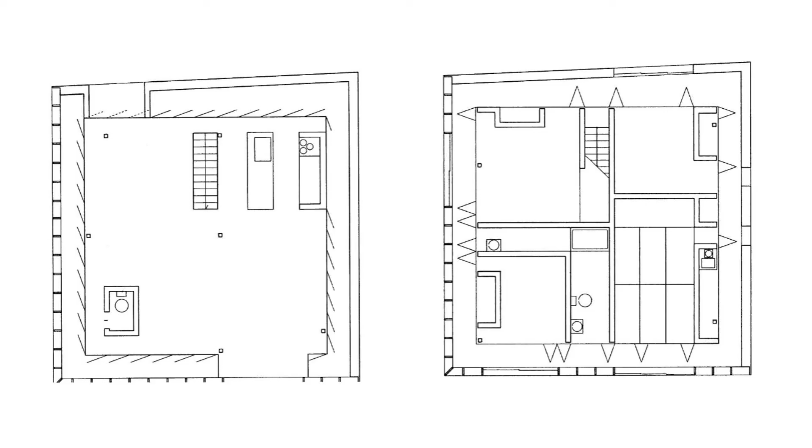The first house they built together is called the S House. As you can see, in a typical setting, it resembles a lantern, just a few layers of polycarbonate. And inside, as you can see from these plans, the house is organized with a series of rooms and a perimeter corridor that connects them all. Each room opens inward and only minimally to the outside. They have this sort of corridor that separates the wooden rooms from the translucent gallery, making the house glow like a lantern at night. At the same time, it creates a space of translucent intimacy.

This is the interior of the house, the one they designed together. It's quite different from other houses they each designed separately. Take, for example, this weekend house, a work by Ryue Nishizawa, the male partner in the duo. It's a weekend house, and therefore, when not in use, it's meant to be hermetically sealed, as you can see here, almost like a hermetic box.

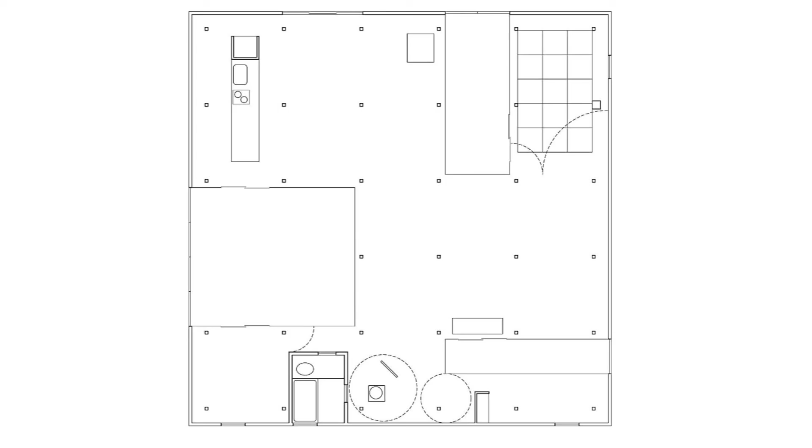And in the floor plan, you can see that it is crossed by large courtyards that penetrate the interior and are finely enclosed. So, when the house is open, it looks like this, a single-story house perforated by courtyards, but which can be sealed like a box. And ultimately, this house reveals the light and translucent quality of Nishizawa's architecture, which strives for the walls to be so thin they almost disappear, and for the structures to be so slender they seem almost impossible. And this is the image of this house by Ryue Nishizawa.

I'm going to contrast this with a house by Kazuyo Sejima called The Small House, which truly lives up to its name. It's a house, as often happens in Tokyo, with one floor stacked on top of another, and with a peculiar shape that simply adapts to the irregularities of the site and the need to accommodate its functions. You can see here that at one point the house even has to be set back to make room for the front of the car, because otherwise there's no way to fit the usual functions of a house into the mere 80 square meters available.

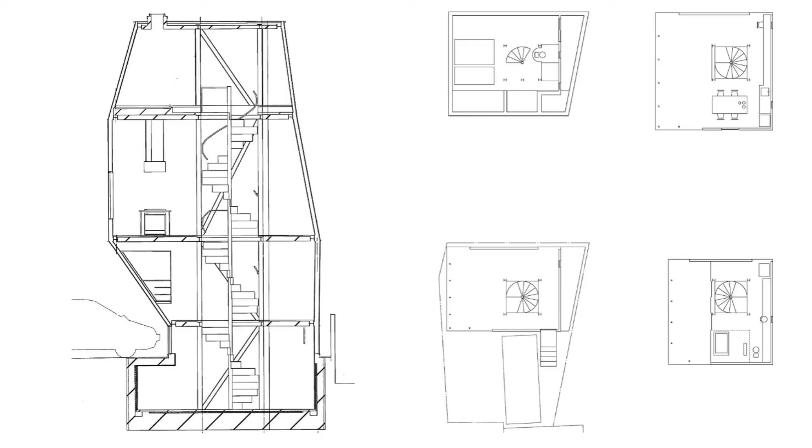The house is traversed by a spiral staircase that stacks these small spaces one on top of the other. And this is the image of its interior that you can see here. Shortly after, Kazuyo Sejima designed another house that captured everyone's imagination, the Plum Orchard House, again in Tokyo. This house is a perfectly cubic structure, built with almost no thickness to the walls.

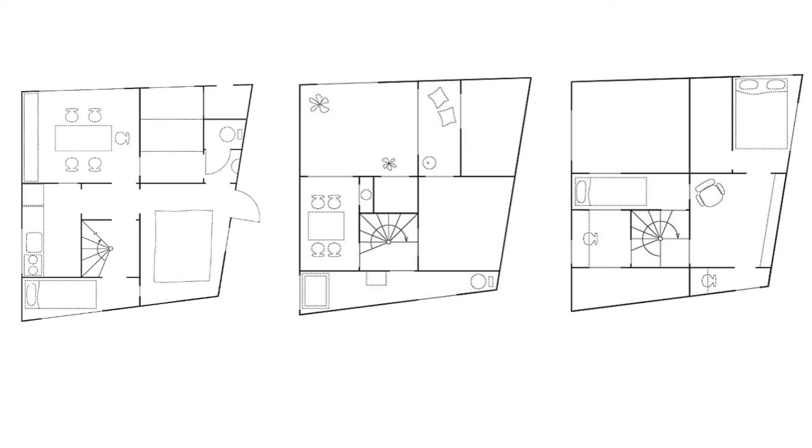Just take a look. This is the floor plan of the house. Don't mistake it for a schematic. It's the actual floor plan. This shows the thickness of the partitions and walls. Why? Because the entire house is made of metal sheets, nothing more, just cut metal sheets. As a result, the connection with the exterior relies on this almost impossibly thin thickness. And it creates, so to speak, two intimate spaces.

And in the end, these open and cut-out alcoves resemble more a house made of paper than a structure capable of withstanding the elements or regular use by people. Now let's contrast these last two houses by Sejima with this one by Nishizawa. This house is best explained with this sketch by the architect.

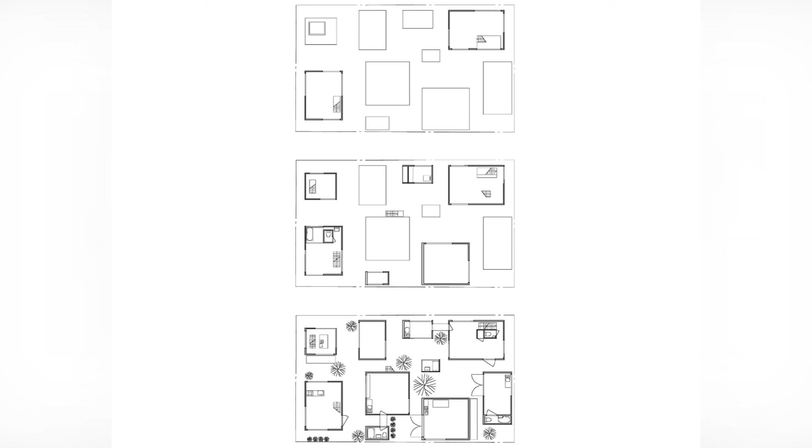Instead of designing a typical house, 2.5 or 3 stories with different rooms, he said, "Since the owner wants to rent out the rooms, why don't we take the rooms and scatter them across the plot like a game, like a concert of boxes within an enclosure?" And this is the floor plan of that unusual house, which you'll understand better when you see it photographed. A set of rooms, each of which is a separate space someone uses. Take a look at it from above.

And now, let's take a closer look at the bathroom. This set of corridors and small spaces forces you, of course, to step outside to go to the bathroom, move from one room to another, or use the kitchen. This extreme fragmentation of the program is something you have to be bold enough to attempt, and the client has to accept that their house will be a collection of separate rooms, almost like pavilions in a garden. However, it creates a completely new type of architecture.

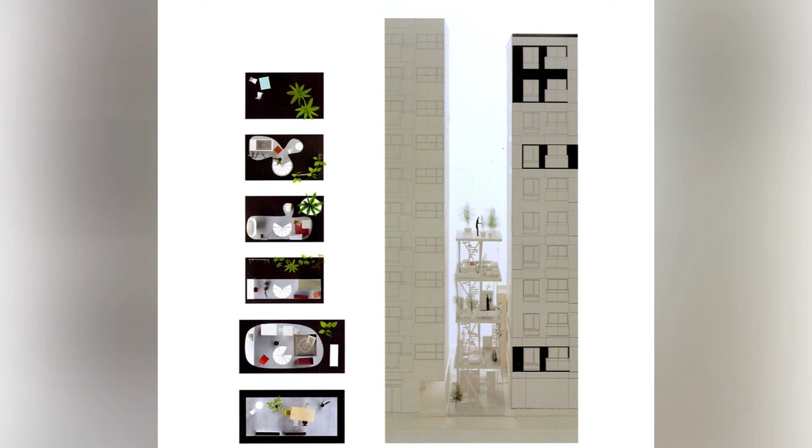Kazuyo Sejima and Nishizawa took these ideas even further in an unbuilt house project that I've brought up here, even though it was never constructed, because it's so extreme that it deserves to be seen. It's called The House and Garden. And notice how what was once a series of rooms placed one behind the other is now stacked one on top of the other. Essentially, each level contains a tiny space and vegetation. It's a house of dizzying staircases and plants, nothing more.

Sejima has often said that she can't live without plants, that she can't live without trees. She's also said that she doesn't read architects. What she loves are plants, flowers, and fashion. Many might see this as a provocation, especially when other architects pride themselves on being well-read and knowledgeable. But Sejima, perhaps even emphasizing her difference, speaks of a love for plants over a love for books.

For many of us who come from a literary culture, this may be difficult to understand, but Sejima's architecture cannot be fully grasped without considering her deep love for plants and that ubiquitous presence of vegetation.

And this is the last house I'll share with you, and this one was indeed designed by both of them. It was created for a Swiss client, and here I'm showing it only as a model, a very large model at a 1:2 scale that was exhibited at the MUSAC in León during the monographic exhibition dedicated to them in 2007. As you can see, the house is almost amoeba-shaped, with circular courtyards and surrounded by a perimeter of glass.

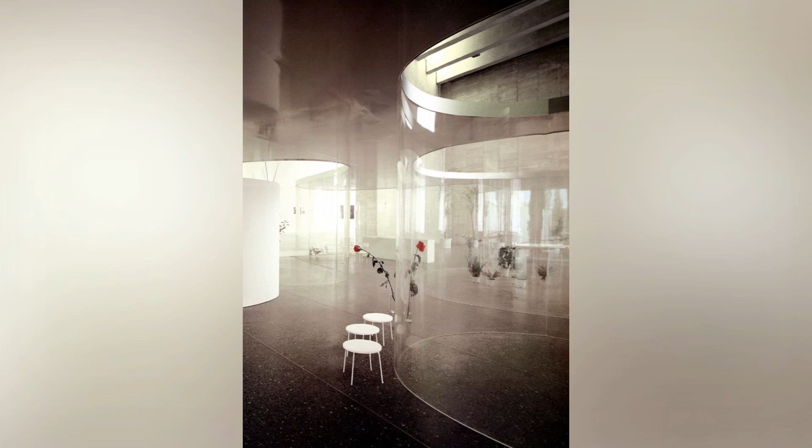The house merges with the surrounding vegetation at its original site, but here, of course, we see it within the walls of a museum, only in this model. At a 1:2 scale, you can see it in the MUSAC, and when you look up, you can see the grand structure of this museum by Tuñón and Mansilla.

These 8 houses trace a journey, and I believe that journey is best summarized not by any of the houses themselves, but by a design object, the tea set they designed for Alessi, which was first exhibited at the MUSAC. Each piece was crafted, carved from soap shaped like fruits, so that in the end, the tea set resembles a tray of fruits. It's an object filled with poetry and magic, something that has to captivate us all.

It's so magical to transform a tea set, where you would typically imagine a tray with the pieces, into a basket of fruit, a basket of metallic fruits. And this is what this pair of Japanese architects has created, a partnership that, as I mentioned, began in 1995. However, Sejima had a bit of history before that, which I will briefly recount.

Sejima entered the world of architecture with this work. A women's residence, a work that fascinated all of us, not only because of Sejima's design itself, but also because of the social fabric that created it. It's a residence for single women. These are women in their first year of work at a large company, and the company believes it must protect them during this initial year in a big city.

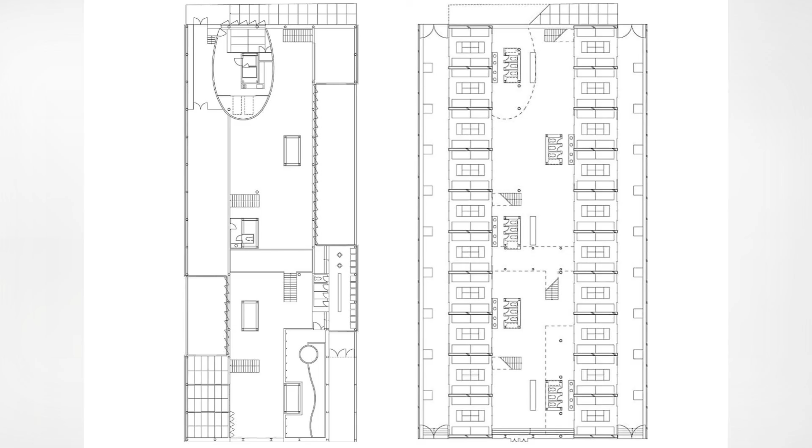These are women coming from rural areas, and the idea is to keep them safe in a setting that is a mix of a boarding school and almost a penitentiary, as you can see. The young women sleep in small cells, 4 to a room, with translucent walls, constantly supervised by a matron who oversees the entire facility. We might see this as an intolerable restriction of freedom, but in the Japanese context, it was viewed as a way to protect young women from rural areas during their first year in the big city, until they could learn to navigate and manage the complexities and challenges of this new environment.

As you can see, everything was constructed with Sejima's signature precise geometries and lightweight surfaces. But at that time, she was still partly influenced by her training with Toyo Ito, which is evident in these gestures, these pastel colors, and these oval shapes that stem from the postmodern architecture of that era. Sejima wasn't fully Sejima as a creator yet, but she was beginning to show it in the radical nature of her proposals, which ultimately expresses itself in environments like this, reinterpretations of traditional Japanese architecture for very new and very different uses, those of contemporary Japanese corporations.

Her second work was also quite disconcerting, and this opportunity came to her due to her condition as a woman. Arata Isozaki, whom we've already discussed because he promoted Rem Koolhaas's first international project in Fukuoka, also promoted a housing complex where he decided, with the help of his political connections, that the project should be designed exclusively by women architects. So, the various residential units were assigned only to female architects. As a result, Sejima was commissioned to design this residential block, which she executed once again with dimensions that seem almost impossible to achieve, so extremely narrow.

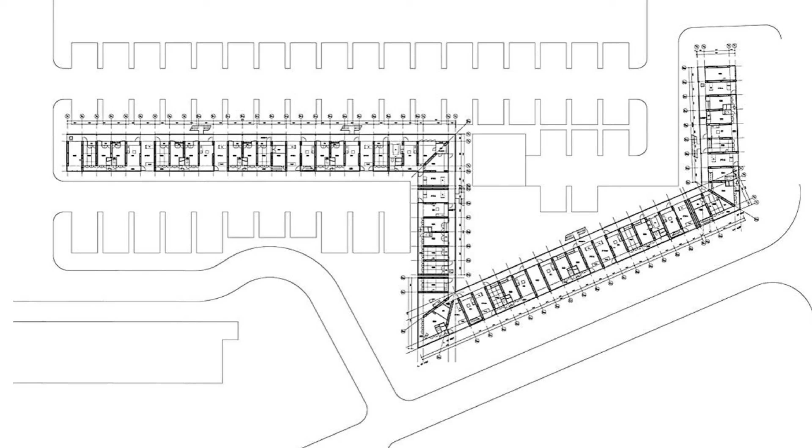Sejima's career reaches its culmination with Nishizawa, although we'll look at a few more projects by Sejima, projects that belong to their joint studio like this one. These projects showcase her extremism and her determination to push beyond all reasonable architectural boundaries, as you can see here, for example. This is a residential project, and it has to be shown in plan because Sejima's architecture cannot be fully explained without drawings. Notice there are 9 units, meaning 9 apartments of 50 square meters each, but look at the unusual way they are organized.

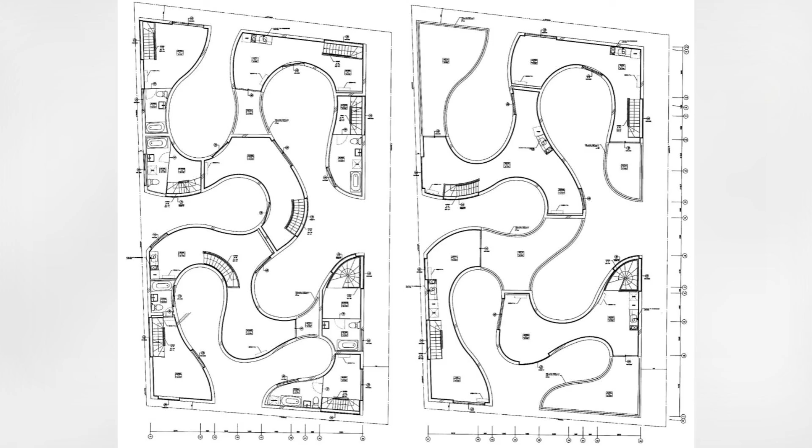Imagine trying to place furniture in there, to live in it, or even just to move around inside. It's quite challenging. In the end, everything was built, and these are things that, when you see them in the project phase, you might wonder how it's possible, that there wouldn't be anyone capable of constructing these concrete slabs or anyone able to promote and sell these unusual units. This one, however, was never built. It didn't come to fruition, but I'm mentioning it because it's so interesting.

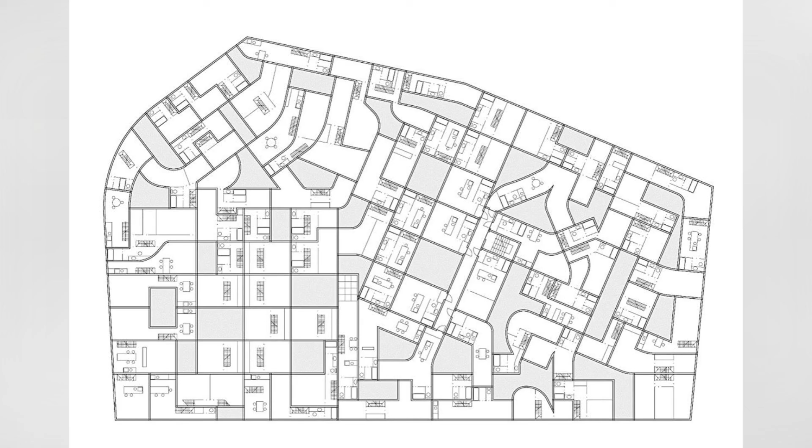What you see here, which might seem like a random collection of pieces, is actually a residential complex. Each of these pieces is a housing unit, and they fit together as you can see here in this plan. It's essentially a large slab perforated by courtyards, as you can see here, and accessed from below. From below, through this network of staircases, you pass underneath the slab, and you access the residential units through the courtyards, entering this articulated and assembled collection of spaces, culminating in that perforated slab.

Sejima has created architecture so translucent, so ethereal, that her mentor Toyo Ito once said, "Sejima's architecture is like that of video games, only suitable for androids, for bodies without scent, without warmth." And there is some truth to that, in her desire to create architecture that is physical but almost virtual. As you can see here in this center, this design studio has pushed the boundaries to such extremes that, to us architects, they seem impossible.

Take a look, for example, at this small cafe in a park. From a distance, you might not even notice it. It doesn't seem to have much to it, but when you get closer, you wonder, how is it possible to make such slender columns? How does this all stay up? Why doesn't it topple over? Where are the rigid elements that keep it from collapsing? The truth is, they're hidden, concealed.

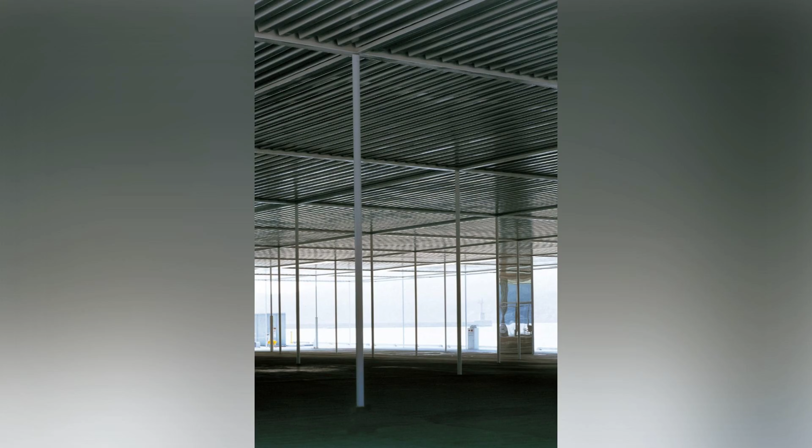But in the end, of course, here you have one of them. You see, in the end, you can spot one of the tricks that allows the building to stand. And they dissolve into that landscape of reflections, but they create buildings of such perfection and lightness that it's truly moving. Here, it's more noticeable. The trick is visible right away.

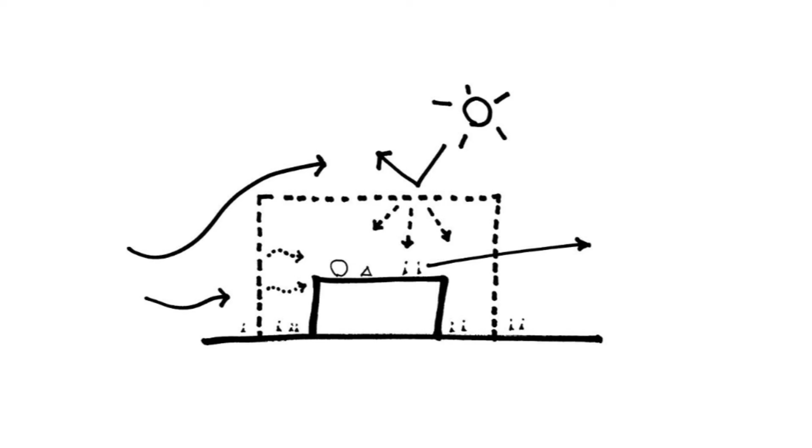This same lightweight architecture was employed, or rather, they employed it, since it's a joint project, for the IVAM, Instituto Valenciano de Arte Moderno expansion project, which they won through a competition. While the other contestants proposed adding new structures to the city that would allow the museum to expand, Sejima did something brilliant. She said, instead of adding pieces, I'll take the original building and place it inside a box where more things will happen. The original building is placed inside a nearly translucent box made of metal mesh. In the end, the city will perceive it as if it doesn't exist, as if it's not even there.

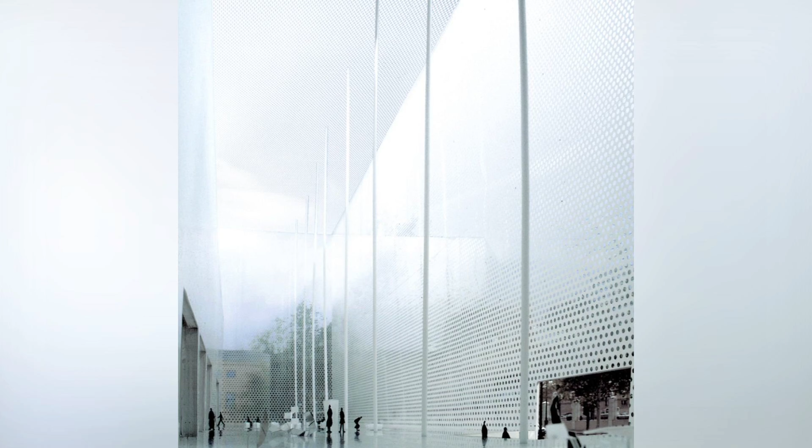And once again, it showcases these slender forms, which I especially emphasize for the architects. How is it possible for a column to be so thin? One might think, this can only hold up if it's suspended from above. It can't support compressive loads. How can this be? She hasn't managed to build it yet, but many of us hope she will succeed, and that this one and only Sejima project in Spain so far will finally become a reality.

A project, however, that serves to introduce another kind of concern from the office. It's a somewhat frustrated project, the only one among Sejima's works that she almost refuses to sign. She says, they did such a poor job. It's a theater in Almere, Netherlands. What you see here is the exterior, which has that somewhat minimalist quality of abstract prisms, but that's not what's important. There are many examples of architecture like this.

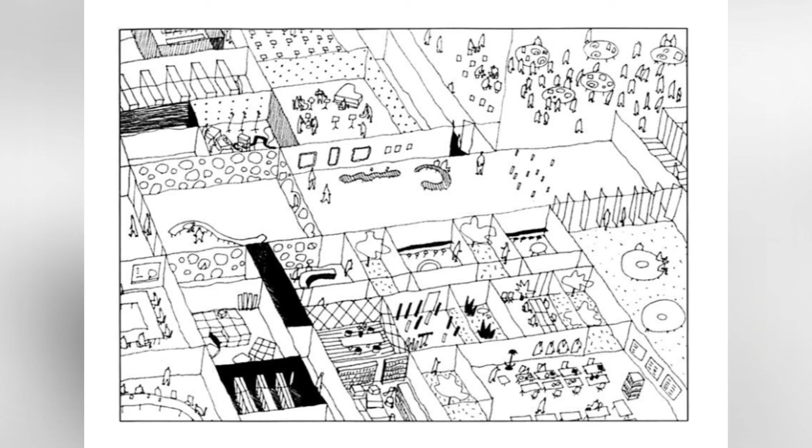What was important was the floor plan. A floor plan where, as you can see, there are no corridors. Every space is connected to another in a sort of labyrinth. The great contribution of the building was precisely this. Not that it was housed within a more or less minimalist and well-executed prism.

It was a floor plan where the traditional separation of corridor and room disappears. However, the Dutch built it full of corridors everywhere, with rooms scattered around, completely destroying the concept that Sejima wanted to convey. That's why she says, it's a building I designed, but I don't dare to call it mine. It's not truly my own. It has none of what I wanted to achieve.

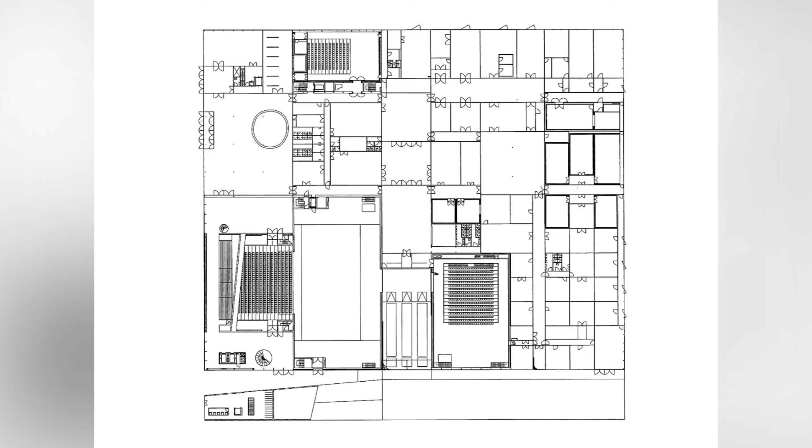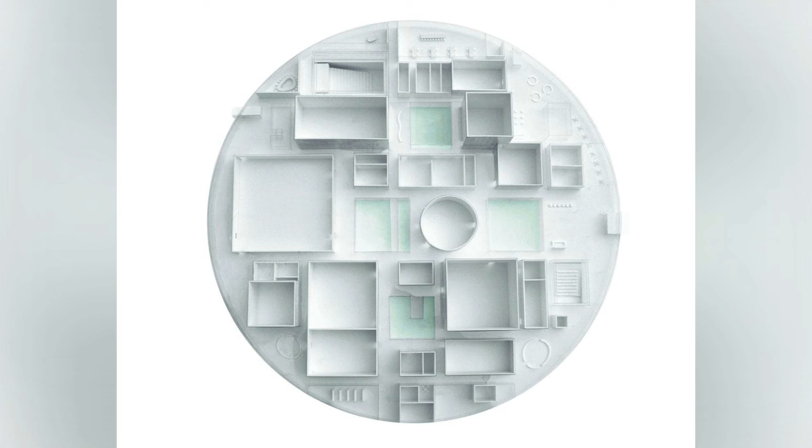And as you can see, the floor plan is extraordinary. It's a plan that has already made its mark in architectural history. In this case, instead of fragmenting the entire floor plan into spaces that flow into one another, it consists of a series of freestanding pieces. The circulation happens through this labyrinth of corridors, or rather, interstitial spaces, left between the boxes.

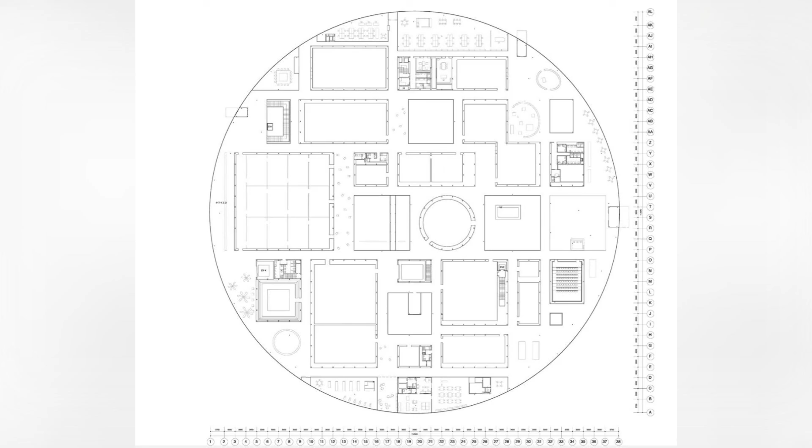Sejima created more than 100 models with the museum director until they found the right sequence of boxes to house the museum's collection. This is the final floor plan. And this is what it looks like. Flowing, as you can see, into this gardened area, with those transparencies that lead you to the courtyards.

And with this final view of the exhibition rooms in this museum, the first image I showed you, Kanazawa, which I said encapsulates her architecture well, where the branching vegetation fills the entire space. This Kanazawa Museum was justly admired. At the 2004 Venice Biennale of Architecture, the Golden Lion Awards elevated her to the status of a major international figure. 6 years later, she was invited back to Venice as the curator of the entire exhibition. In this way, Venice also became a turning point in Sejima's career.

The other building that also marked a significant transformation in the work of this Japanese team was in the United States, in Toledo, Ohio. In this state, glass production has historically been very important, and the museum wanted to have an annex, a pavilion dedicated specifically to glassmaking. So, Sejima designed a glass pavilion for them, a structure made entirely of glass, almost redundantly so. But with this floor plan, which shows the successive visions and the final plan, you can see here how the ideas from the Almere Theater were eventually realized.

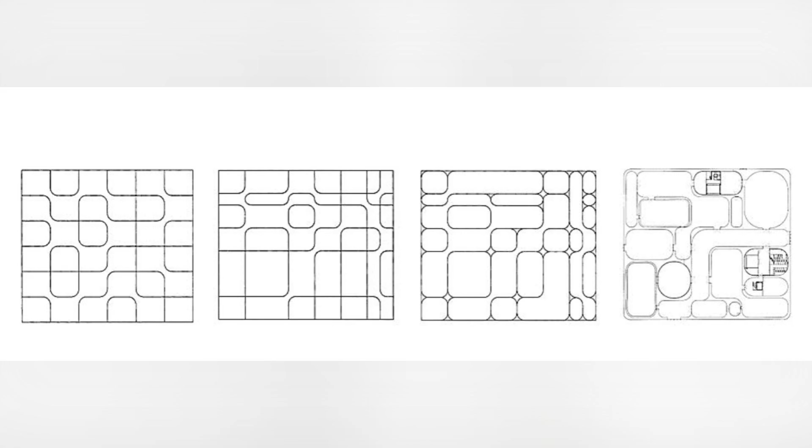Don't be misled by the fact that here the corners are all rounded, while in Almere they were all rectangles. That doesn't matter. What's important is that the traditional hierarchy of access, arrival, and distribution is no longer present. Instead, there are a series of spaces that flow into one another, and through them the museum takes shape. As you can see here, like a collection of pieces.

Transparent pieces that open out into the landscape, which reveal these gaps between the main facade and the also glass-enclosed spaces that house the meeting rooms or the service areas of the museum, which then crystallizes into this view that you can see here from one of the courtyards. That establishes this connection with the exterior.

And in the end, they offer us this image of, I don't know if I should call it, a kind of ethereal condition, where reflections merge with the architecture to create an almost dreamlike environment. It feels as if we are inhabiting a dream, unable to distinguish the circulation paths. The succession of glass planes and the fact that they are rounded causes everything to blend together, ultimately giving us this extraordinary image.

Of course, Toledo, Ohio isn't a place most people visit, but the images of the museum spread widely, significantly boosting Sejima's prestige in the United States, which would later lead to a commission we'll discuss later. But before that, we'll talk about her work in the fashion world. For Dior, she built a headquarters in Omotesando, the same neighborhood where we saw the Prada headquarters by Herzog and de Meuron. Right next to the Prada building is the Dior headquarters.

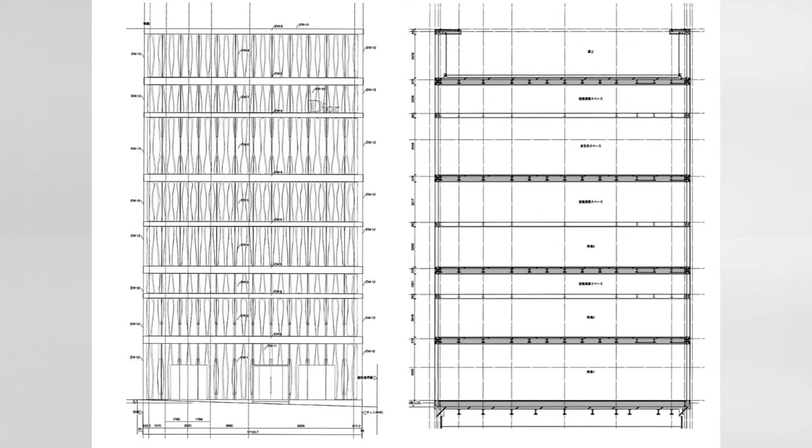This layering of scales gives it a special magic because we don't relate to it as we would with a typical building or in relation to the human body. When you see a window or a door, you usually know a person can look out or pass through it. Here, there's no reference to the body, no reference even to the successive floors. On the contrary, it's a deceptive, ambiguous building and in many ways theatrical. And here you can see it with daytime lighting.

The museum in New York is quite different, but it's also a tall building. It should be noted that tall buildings aren't Sejima's specialty. It's very difficult to achieve her world of reflections, evanescence, transparency, and lightness in a tall building, which has strict regulations from fire safety, security, etc. A tall building has very different conditions that don't easily lend themselves to that light and evanescent architecture.

However, she has managed to develop it with a certain dignity in this new museum in New York, located in a degraded area, the Bowery, surrounded by buildings in very poor condition. She designed it as a succession of boxes in an unstable balance, once again trying to convey that sense of lightness. In other cases, she achieved this with tricks of scale. Here, she does it by making the boxes appear as though they might fall. You might say, but we've seen this stacking in Koolhaas, we've seen it in Herzog. There was a time when this approach was very fashionable.

Let's consider how the relationship between the structure and the exterior is not direct. In other words, some aspects are expressed on the exterior and some are not. One of the key dogmas of modern architecture was that it had to be honest, meaning it should express its function on the exterior and not have a discrepancy between the face of the architecture and the body behind it. However, Sejima's architecture is always different. I wouldn't call it dishonest, but rather illusionistic. It's always theatrical. It never reveals what's behind.

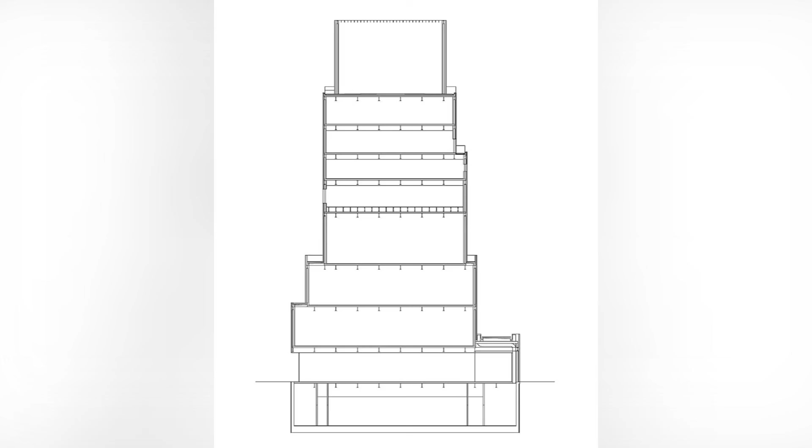We don't know what's behind when we look at the section. We see what the floors are, where the rooms are, but when we look at the building, we don't know. We see stacked boxes and assume each box is a floor, but then, when we see a section, we realize that's not the case. You might say, well, we've seen these stacked boxes in many other architects' works, and in fact, it has almost become a cliché of 1990s architecture. Stacked boxes have been used everywhere, even in furniture advertisements. They've used stacked boxes in Japan as well, so it's not all that original in that sense.

What is original, however, is how she uses those boxes, as you can see in the models from her studio, with a different purpose. It's not just about creating an image of instability and thereby communicating lightness, because only something light can appear unstable, but the shifts between the boxes create spaces that function as skylights or terraces. These spaces are integrated with the interior zones, allowing the art spaces to have natural lighting that they otherwise wouldn't be able to achieve.

In the end, Sejima was very pleased, as you can see, with her final box, and she posed with it. Of course, it's not her best project, but it was in New York, and New York is the world showcase. Building in New York was so important for her, and for anyone, that this project, which isn't among the most significant in her portfolio, became the most widely publicized. For many reasons, it became the most well-known and the most visited by people.

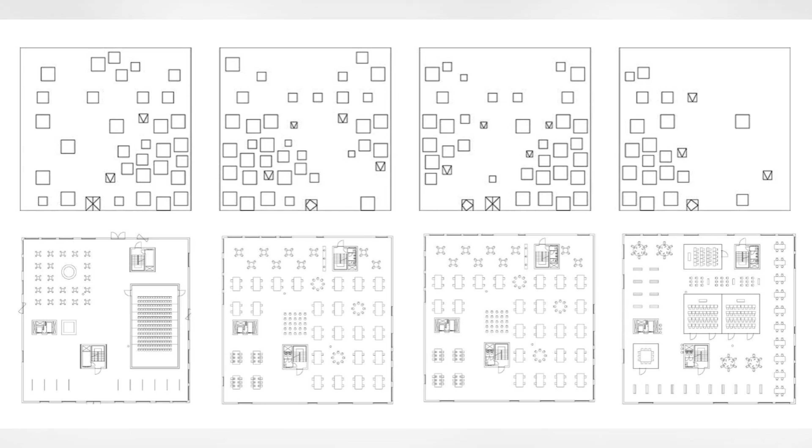And when we see the section, we understand the building, which indeed consists of just 4 large rooms, 1, 2, 3, and 4, stacked one on top of the other, plus the terrace. But from the outside, we would never have guessed because this random arrangement of square windows gives us no clues, just like we didn't have any clues with the Dior building or the new museum in New York.

You will also notice that it is not only a fascinating and hermetic facade due to its difficulty to interpret and understand, but also because of its thinness. Look at it at night. You can see it even better. I invite you to consider how many buildings we've seen with such an incredibly thin facade. How can it be achieved? How can it be done? It's not possible to isolate it from the climate. It's very cold in the Ruhr Valley. How does Sejima manage to create a facade where you wonder, where is the insulation? Where is the thermal inertia? How is it possible to do this?

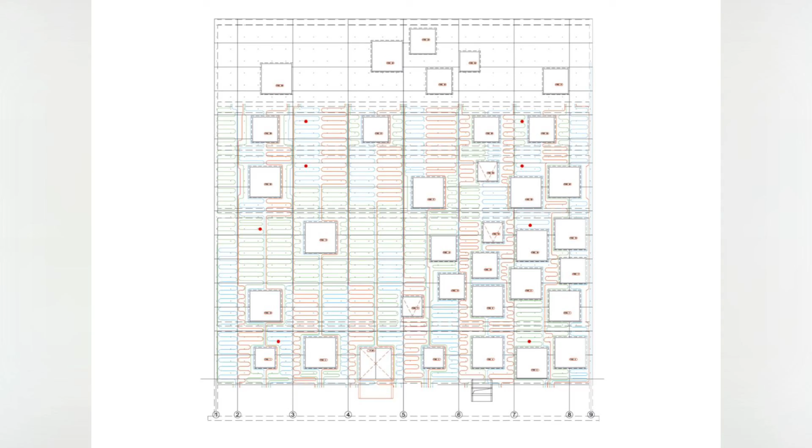In this case, it involves a technical resource. Hot water serpentine pipes embedded like in underfloor heating, thanks to their geothermal energy, which provides very cheap or almost free hot water. With these serpentine pipes, the entire facade can act as a radiator, enabling Sejima to create such a thin facade that it looks like it's cut out of a cardboard model. Again, to achieve this completely illusionistic impression requires a lot of technology and knowledge. And this is ultimately the result of the building.

And it has moments of beauty and emotion that are difficult to match, in my opinion, far superior to those of the New York Museum. Even though it's easier for us to travel to New York than to Essen to visit it, this is Sejima. With these buildings, she has already secured a place in the history of contemporary architecture. And she has received such unusual invitations, like the one to design for Novartis.

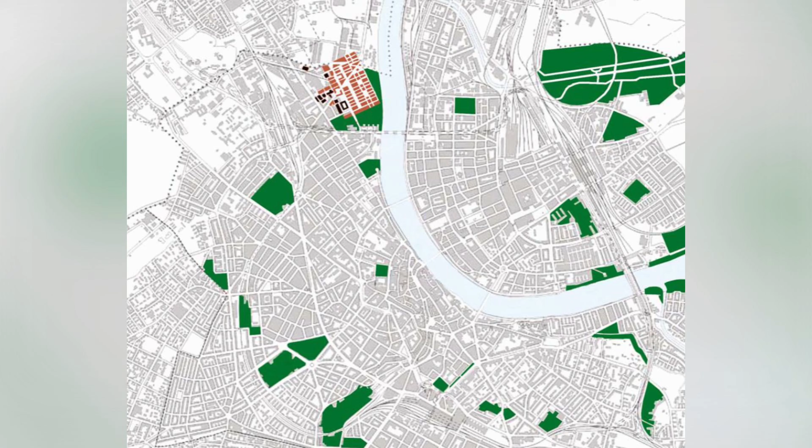Novartis is, well, I don't know if I should call it an architectural zoo, but it is indeed a zoo of architectures. Novartis is a major pharmaceutical company in Basel whose president is a man in love with architecture. He wanted to make the company a place that hires the best architects in the world to design its campus. They have built with everyone, from Rafael Moneo to Frank Gehry, Herzog and de Meuron, and the list goes on. Sejima was commissioned to design an office building. This is the campus by the Rhine in Basel. Each of those pieces you see there was designed by a different architect, all of them part of this kind of first division of architecture.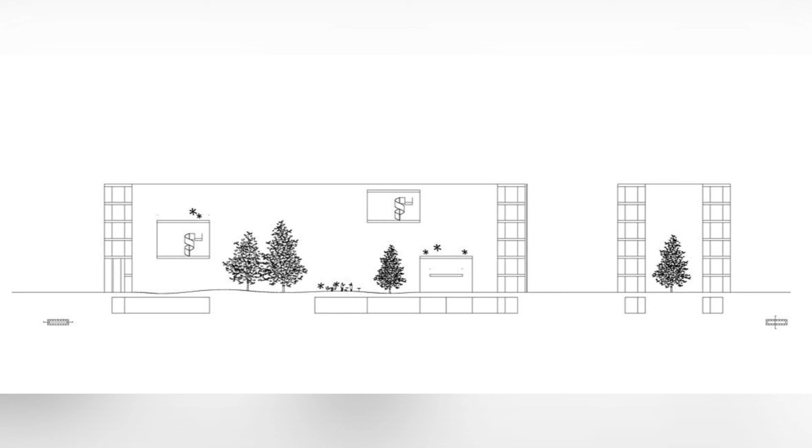And when Sejima worked on this project, the real estate division came along and said, "But how is it possible, Miss Sejima? How can you make something with these two facades so close together? There's no room for offices, no room for desks, nothing fits." But look at the section. The section is extraordinary. It's incredible. One wouldn't imagine that such a building could exist. In the end, it's a large screen, but it's only 4 meters deep.

It only fits one person, another person, another person, and a corridor for circulation. The view at the entrance of the campus is beautiful. It's like a large screen that presents the campus. Of course, with carefully chosen furniture, all homogeneous, it's like an exhibition. But when you move inside, it's very uncomfortable because there's nothing more than a work desk and a corridor. You have to disturb everyone you pass by.

I don't know any office building in the world that has been built with 2 glass facades 4 meters apart. It seems like something unusual, but Sejima achieved it like so many other things. And finally, to conclude, with 4 pavilions and 2 buildings. 4 pavilions. Some of them interventions in existing pavilions, others temporary, others permanent, that express a bit of the moment in Sejima and Nishizawa's architecture.

This is an intervention they did in the Mies van der Rohe Pavilion in Barcelona, which everyone is quite familiar with, where they inserted these curved glass panels that will look familiar from the Ohio project. And indeed, they contribute to seeing Mies's architecture from a different perspective, introducing the illusory element into what was originally an extremely rigorous building, where the dissolution of space and the creation of the open plan excluded this play of reflections. Sejima introduces what I'm saying is only an installation.

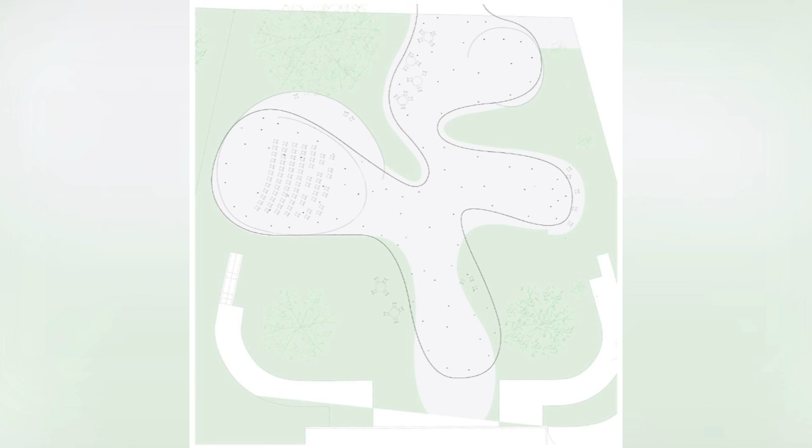This is not an installation. It's a pavilion, though it is also ephemeral, lasting only 1 summer. The Serpentine Gallery in London commissions a prominent architect each summer to create an ephemeral pavilion that lasts for the season. All the great architects have done it, and this is the one Sejima created, again with these somewhat amoebic forms. Here is the floor plan of the pavilion. And here is the image with its chairs, which you can see housed underneath.

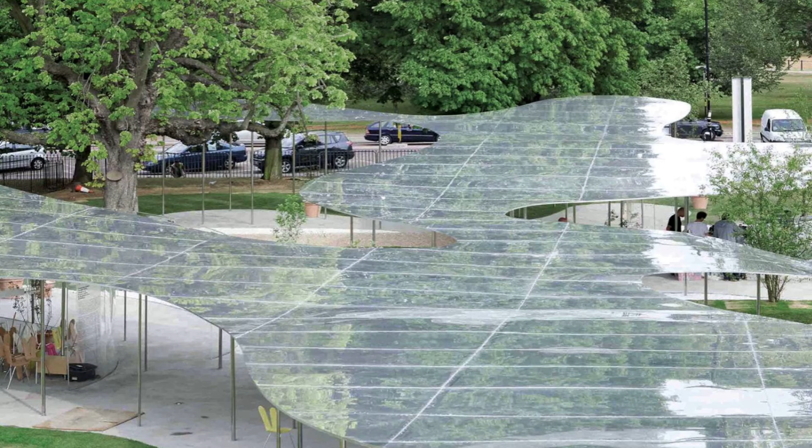It's just a subtle gesture in the park, a gesture that, from a distance with that extraordinarily thin roof, dissolves and blends into the vegetation. It's a gesture that disappears. Even further, she has wanted to push the limits with a series of pavilions she has created on a Japanese island to house works of art, and they all have the appearance you see here. This is one of them.

This is another one that almost disappears again, because it is just a corridor with 2 translucent spaces, 2 translucent membranes. Or this small, ridiculous one, which defies the limits of lightness. This one was made solely by Sejima. Her partner, Nishizawa, when given a similar commission on another island, also for a small pavilion, did something very different. Notice how Sejima sought this strategy of disappearance, while Nishizawa, on the other hand, did a large concrete shell, a great concrete blanket, which forms an unusual space in that extraordinary Japanese nature, and ultimately gives us images like this.

This idea of the concrete blanket is what they used to create the last building they inaugurated in Lausanne, in French-speaking Switzerland. The Rolex Center for the university is a multi-use center with libraries, various restaurants, workspaces for students and professors. It won an international competition with the following stipulations. Architects could choose any plot they wanted and design any type of building they preferred, considering this was all the space the university had available to expand and grow. Sejima made the unusual decision, unlike all other competitors, not to select a fragment or another part of the campus, but to use the entire space.

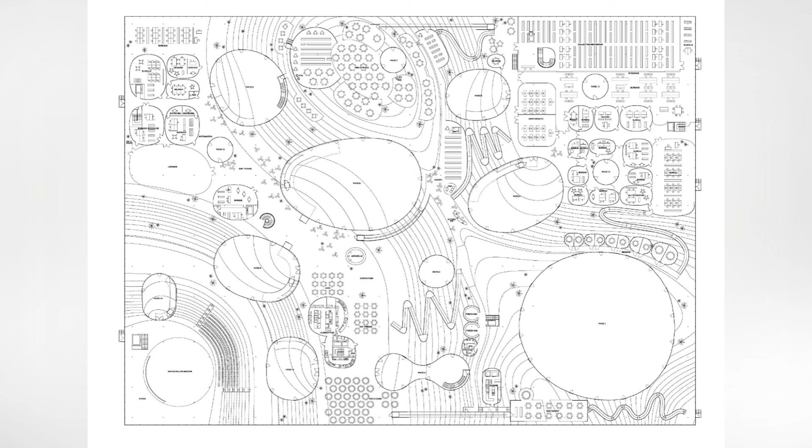If the university wants to build a biotechnology or nanotechnology institute in the future, they would have to buy more land because Sejima decided to use all the available space, leaving nothing behind. This was another point of contention with the university administrator who said, "This cannot be. You cannot use all the land we have." Nevertheless, Sejima did it and built it, 2 parallel concrete blankets as you can see. With this extraordinary plan where each of the uses is housed in these almost ethereal bubbles.

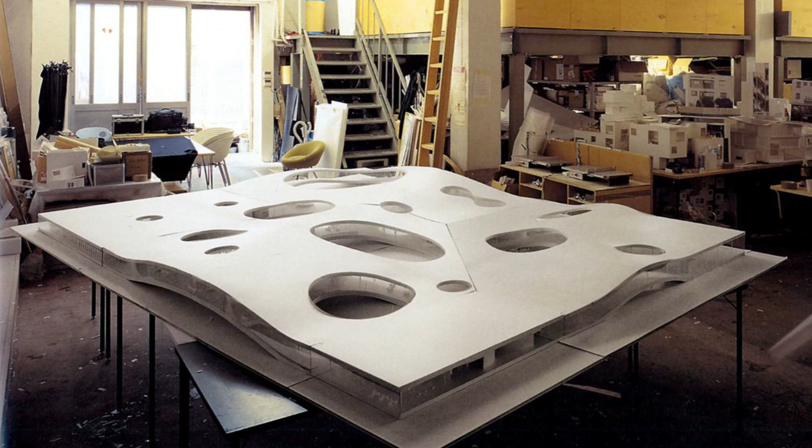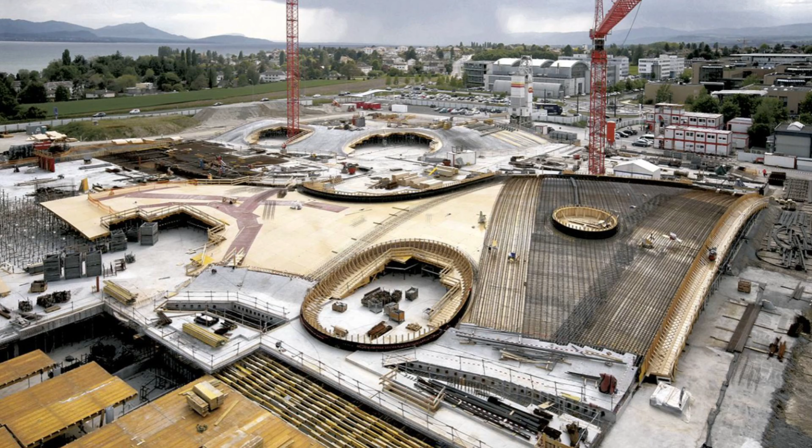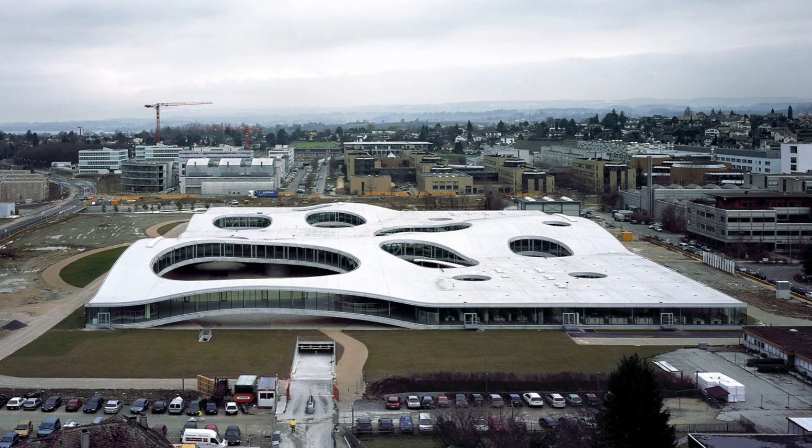Which thus manifests its sleek geometry. And in the end, it also leaves us with images like this, extraordinary images of an architecture that, I believe, deserves both our applause and our astonishment. It is an irreplaceable architecture, not one like that of other architects from which we can learn. For us, it's not just something pedagogical to share with our colleagues, professors, and students at the school.

How can someone who is tasked with designing a library and restaurants immediately propose such a sleek concept in both directions? Well, the technical and financial effort and the land use is colossal, but in the end, the result is a memorable icon, and all this is achieved in a relatively small studio. And it has this somewhat grim appearance, with the light from the windows above, barely any natural light, where people work 13 or 16 hours, sometimes sleeping under the tables. And yet, despite this, Sejima, with these projects, has become one of the greats in the world of architecture.

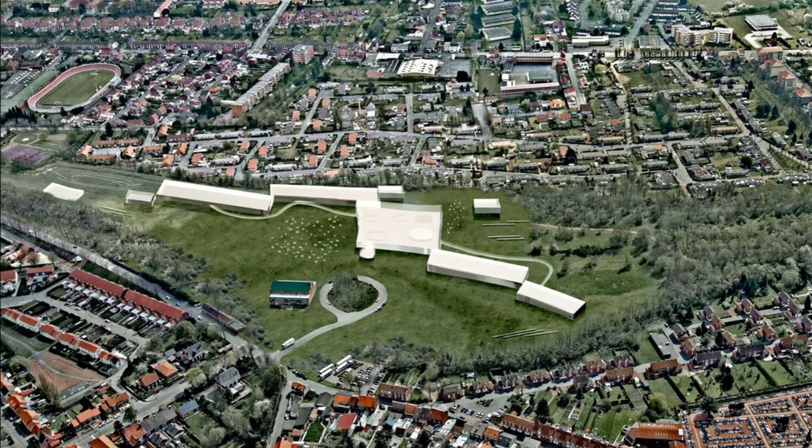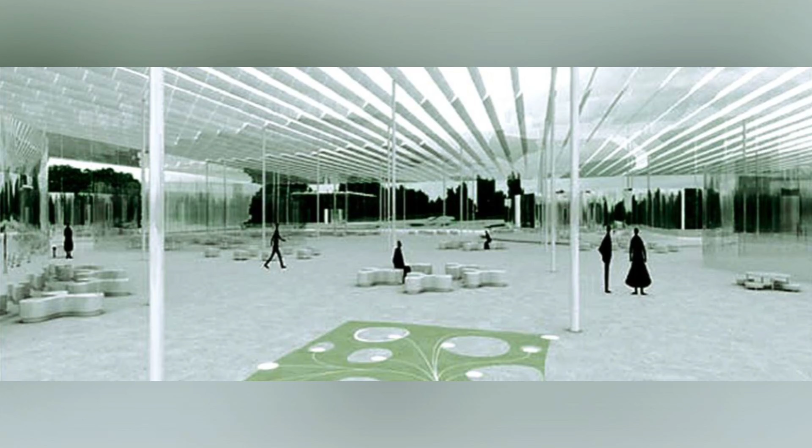The project is extraordinary. She mentioned that she is now dedicating herself solely to this project, as it is so challenging that she needs to put all her energy into it. She has many small projects, but the only one that currently occupies all her time and effort is the construction of these pieces, which appear to be randomly placed in the middle of this park. These pieces conform to this floor plan that you see here, which is very similar to others we have seen. And it has this interior image where, as you can see, Sejima occasionally depicts herself, sometimes in the plans.

And they strive above all, through the enclosures and through this illusionistic strategy, to disappear, to fade away, to reach a state of non-existence. Until a great museum can be nothing more than a reflection that we see dissolve and fade away, and whose image we can no longer associate with a memorable icon. We think of Wright's Guggenheim, oh yes, a great spiral, or the titanium storm of Bilbao. We can associate all these museums with an icon, with an image etched into memory. But here, Sejima takes the strategy of disappearance to its ultimate consequences.

In truth, the essence of Sejima's architecture is that it invites us to be austere, to achieve spiritual purification through that stripping away. Or is it superficial because we are all superficial? Is it because she wants us to be, or because we simply are? That's a question I haven't been able to answer. What I do know is that this strategy of extreme lightness, sometimes completely inconceivable in conventional architectural terms, produces aesthetic and emotional results. I sometimes say, I understand Foster, I understand Koolhaas, I understand Herzog, but Sejima I don't understand. I admire her with astonishment and awe, but I don't understand her. Yet I admire this strategy of disappearance.